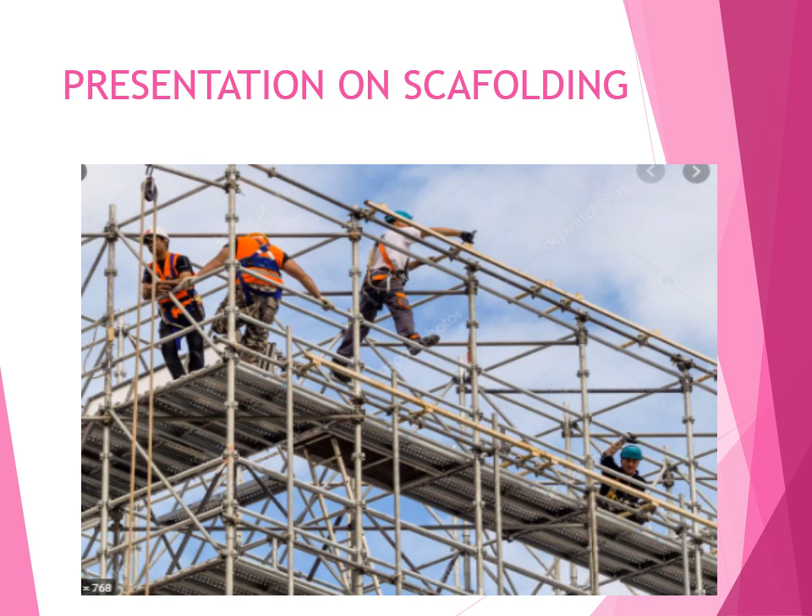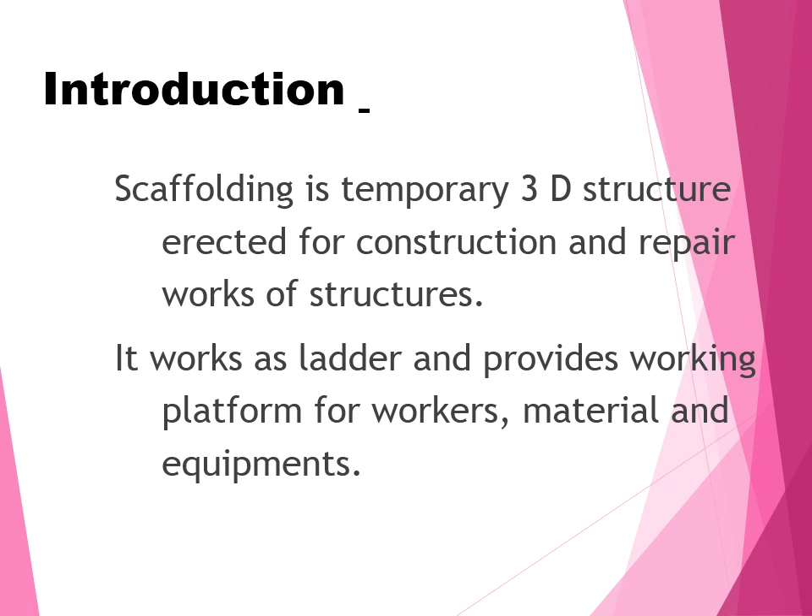Introduction. Scaffolding is a temporary 3D structure erected for construction and repair works of structures. It works as a ladder, provides a working platform as well as support for material and equipment.

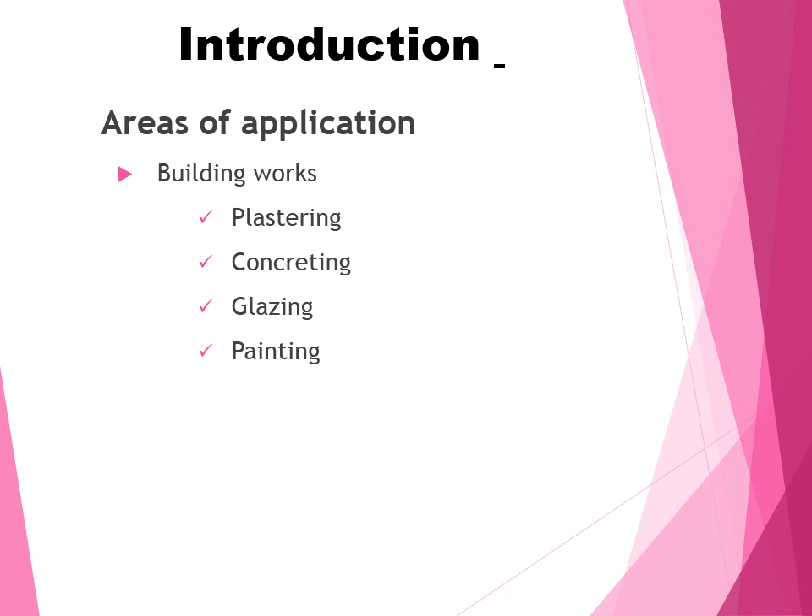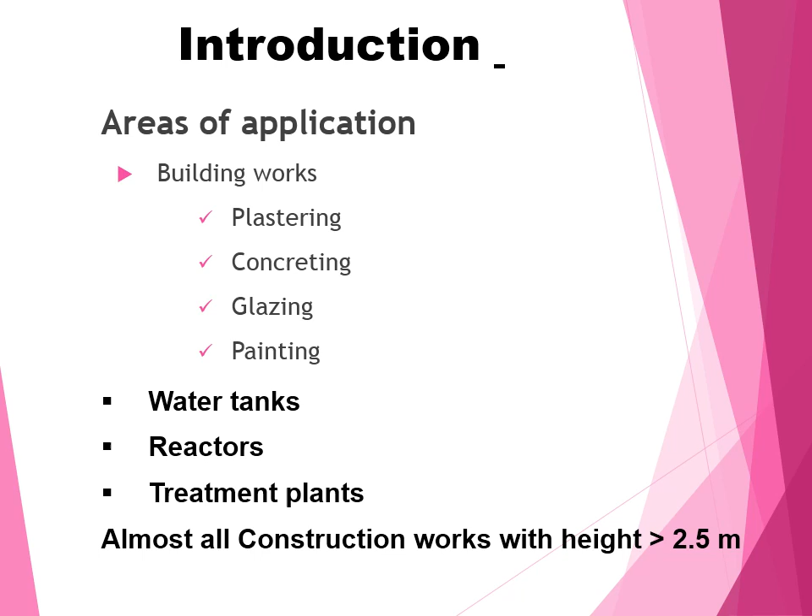Areas of applications. Building works. In building works, plastering, concreting, glazing, painting and other works which are to be done at higher elevations. Construction of water tanks, reactors, treatment plants, almost all construction works which have a height of more than 2.5 meters.

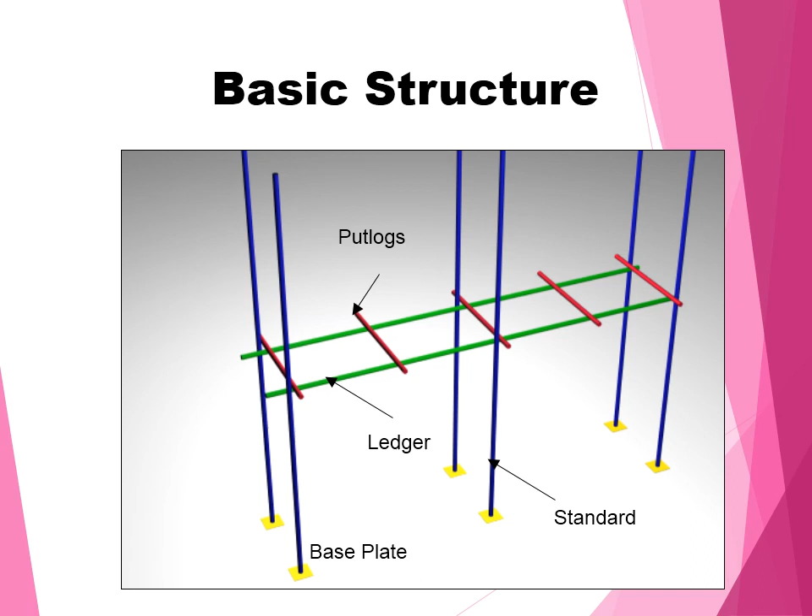Basic structure. A scaffolding consists of the basic structure which has a base plate at the bottom of the vertical mullions, which is known as a standard, and there is a ledger which is connecting the vertical mullions, and the putlogs. The putlogs connect both the horizontal mullions to avoid any lateral movements.

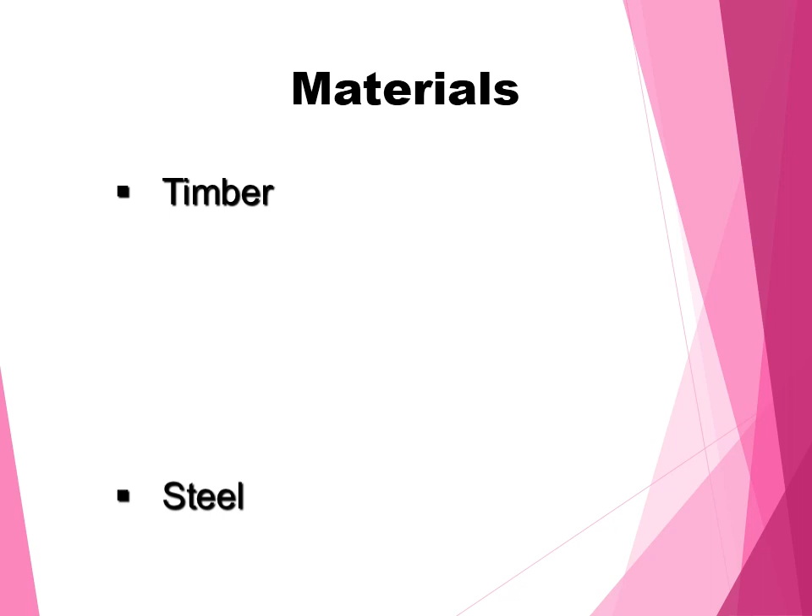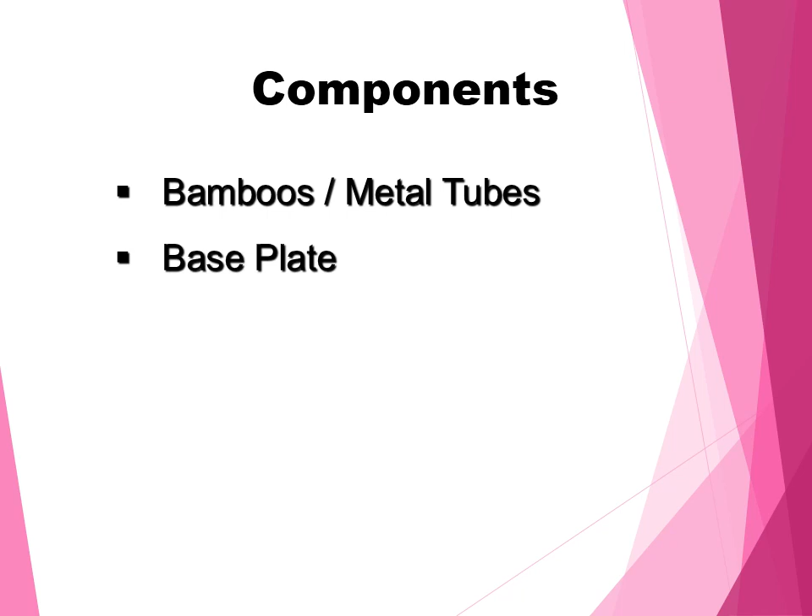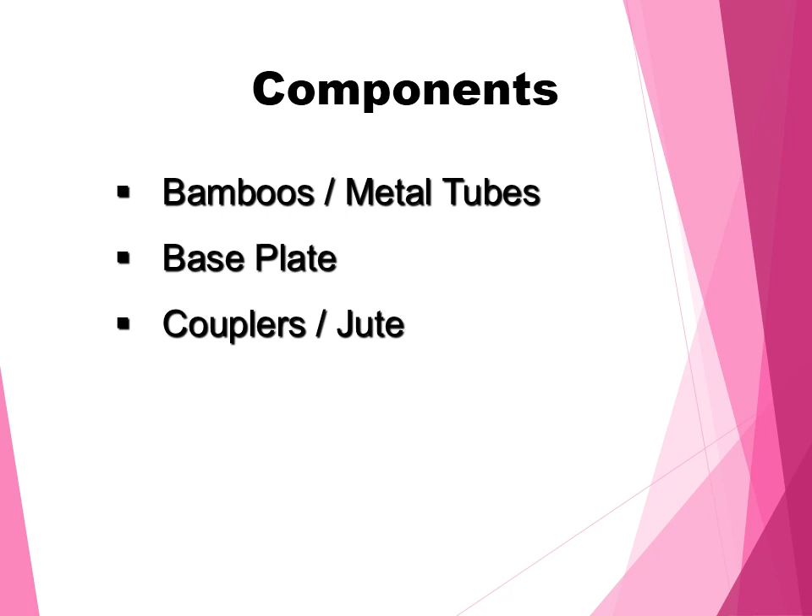Materials. It can be timber or steel. In steel it can be a black or a galvanized one, aluminum or any other suitable material. Components of a scaffolding: bamboos or metal tubes, base plates which are used for metal tubes, couplers and jute. Couplers are used for connecting the metal tubes, jute is for tying the bamboo members. Working platform, which is also known as decking.

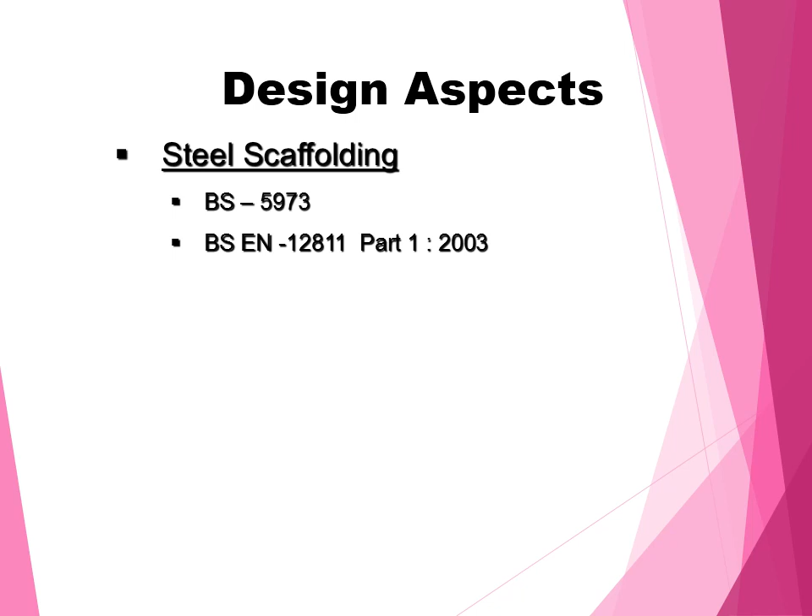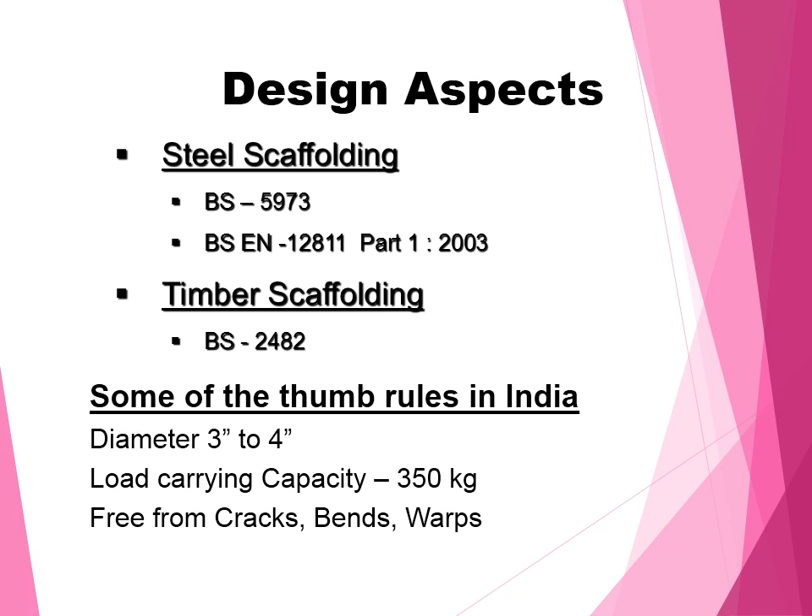Design aspects. Steel scaffolding is based on British Standard 5973, 12811 Part 1 2003. Timber scaffolding is based on British Standard 2482. Some of the thumb rules in India: the vertical mullions, when we are using Casuarina poles, should be 3 to 4 inches dia. Load carrying capacity will be 350 kgs. Free from cracks, bends and warps.

Steel pipe scaffolding. Steel pipe scaffolding as per IS 1161 is as follows. If the dia is 50 to 60 millimeter and the class is light, the thickness will be 2.9 millimeter. Weight per kg per centimeter is equal to 4.08. CSA per square centimeter 1711. In the case of medium, it will be 3.6 thickness, 5.09 weight per kg per centimeter, and 1667 is the CSA.

In case of heavy, 4.5 is the thickness in millimeter, 6.19 is the kg per centimeter, 1611 is the CSA per square centimeter. If the pipe is 65 to 76.1, light will be 5.71, 7.32, 2189. Medium will be 6.42, 8.2 and 2163, which means thickness, weight per kg per centimeter and CSA per square centimeter respectively.

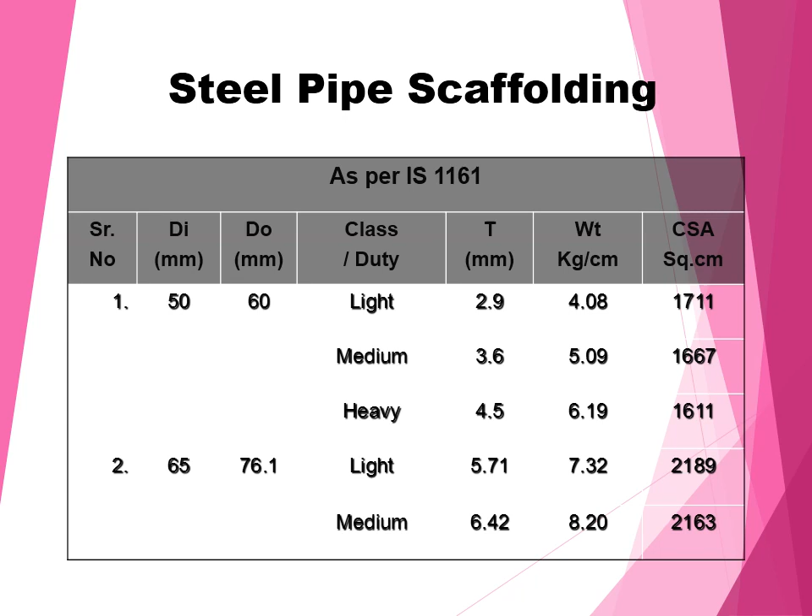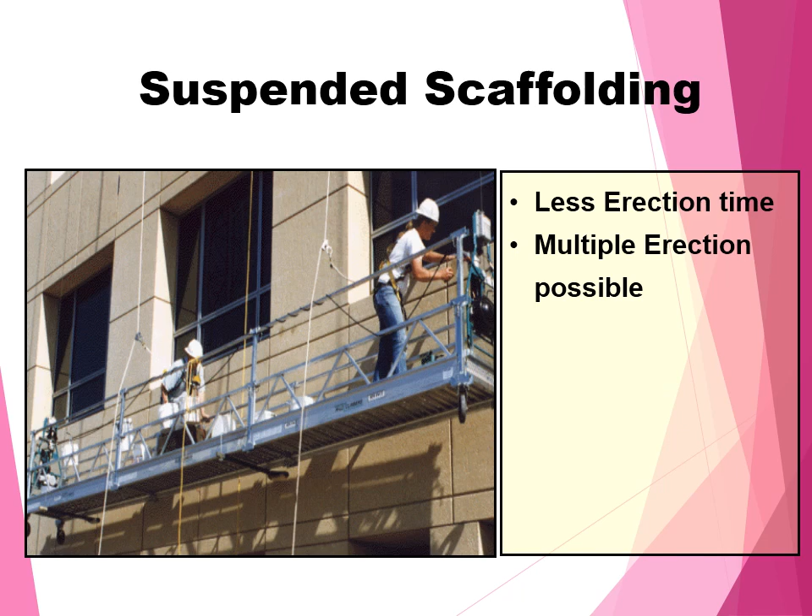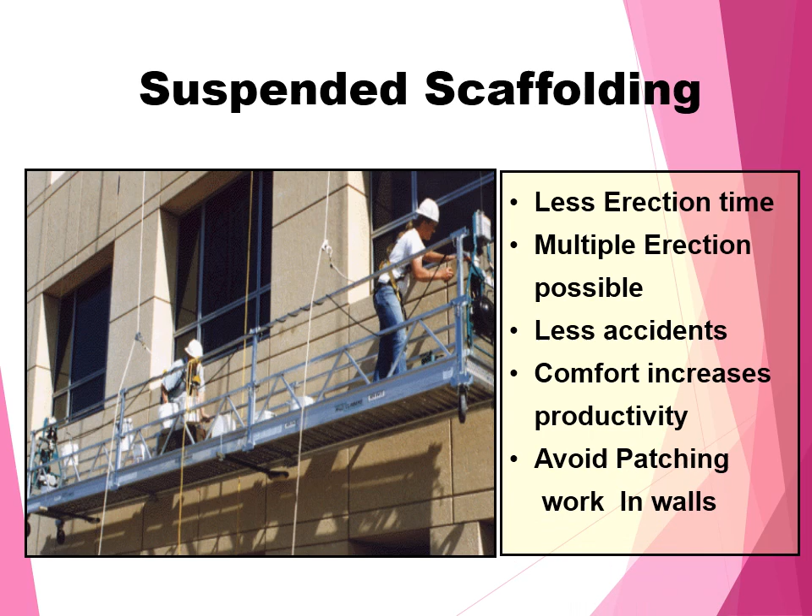Suspended scaffolding. This is nowadays mainly used for cleaning the external cladding, external facade, etc. It requires less erection time, multiple erection is possible, fewer accidents, comfort increases the productivity. Avoids patching work in walls.

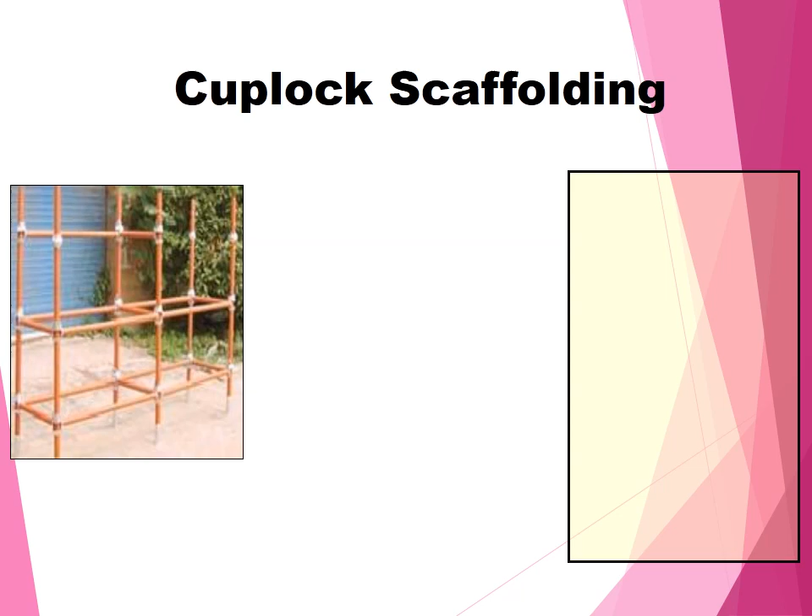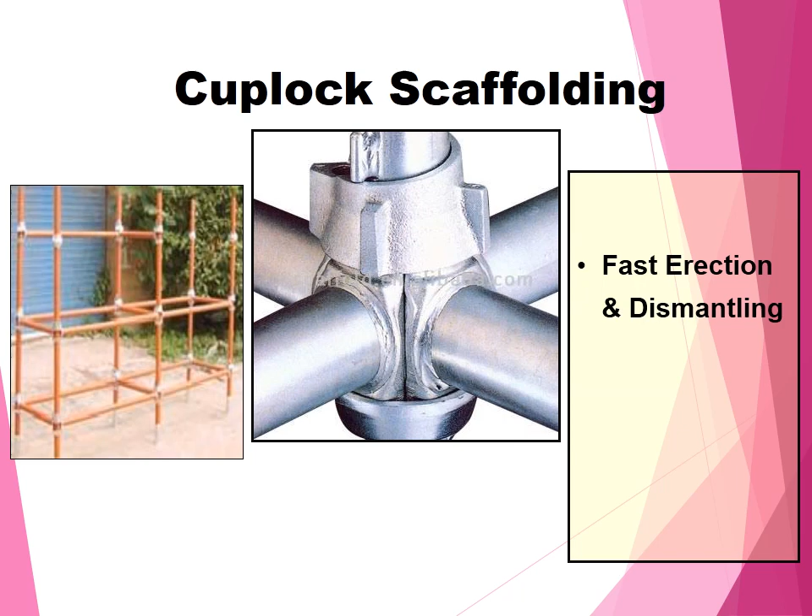Cuplock scaffolding. This is the image of a cuplock scaffolding which has pipes connected with cuplocks. This is a cuplock, which can be categorized as 90 degrees, swivel coupler, etc., which will be explained in the next pages. It gives you fast erection and dismantling. Can be used for centering also.

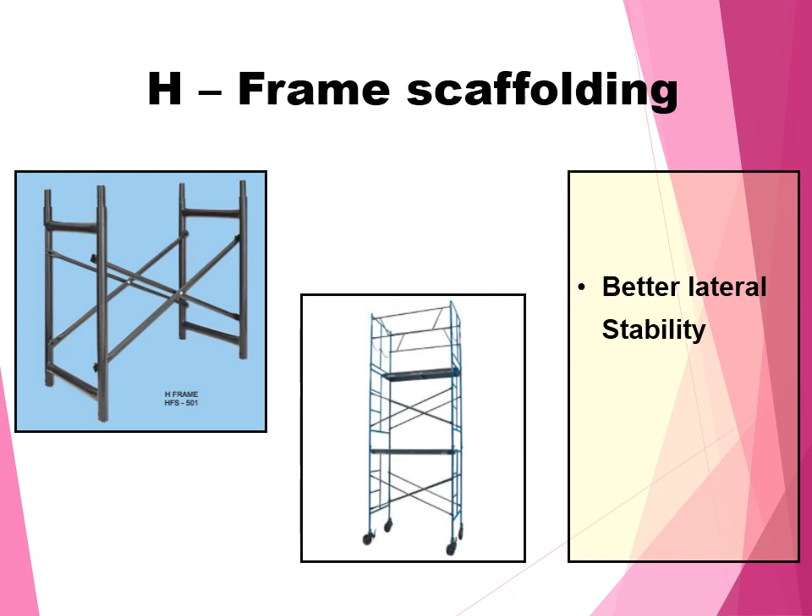H-frame scaffolding. H-frame scaffolding looks like this. Dimensions will be 2 meters by 1.1, etc., as per the manufacturer specifications. It will look like this, connected with the tie bracing and everything. You can put a wheel at the bottom so that you can move it as a movable scaffolding for any other works. Better lateral stability as it has been tied with the bracings. Faster erection, can be folded so that it will not occupy major spaces.

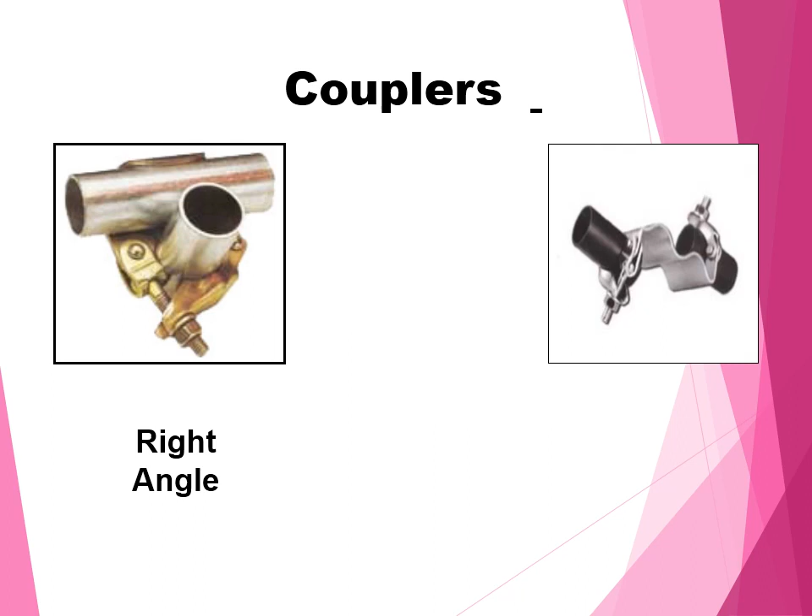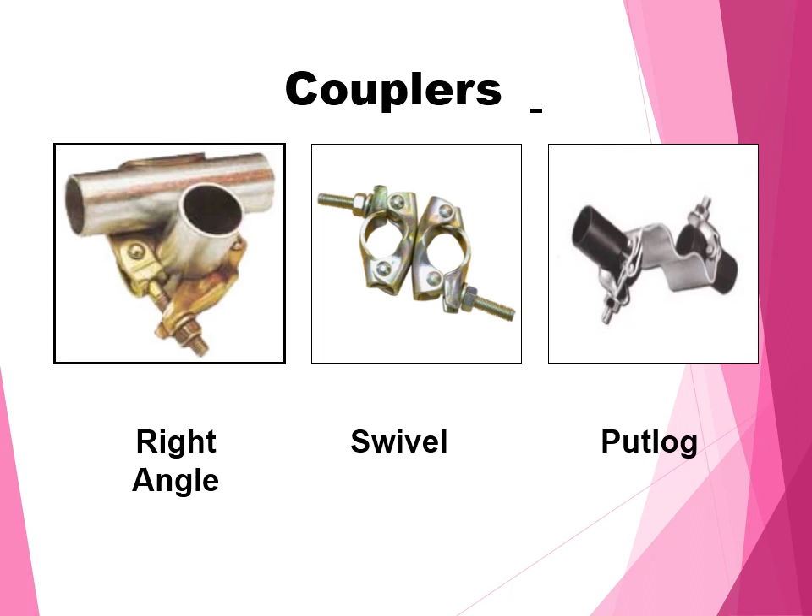Couplers. This coupler is known as the right angle coupler, wherein you can connect it to a vertical member and the horizontal members. This is known as a swivel coupler. You can connect it vertical, horizontal, at any direction. And this is a putlog, which connects the horizontal member to the lateral members.

Dimensioning. This is known as H-frame dimensioning. This is the base lift, which I am talking about at the bottom. Transom spacing, which is known as a putlog system. This is the lift height between the bottom to top. Scaffolding width will be between the two frames. Bay length will be from one vertical member to the other vertical member.

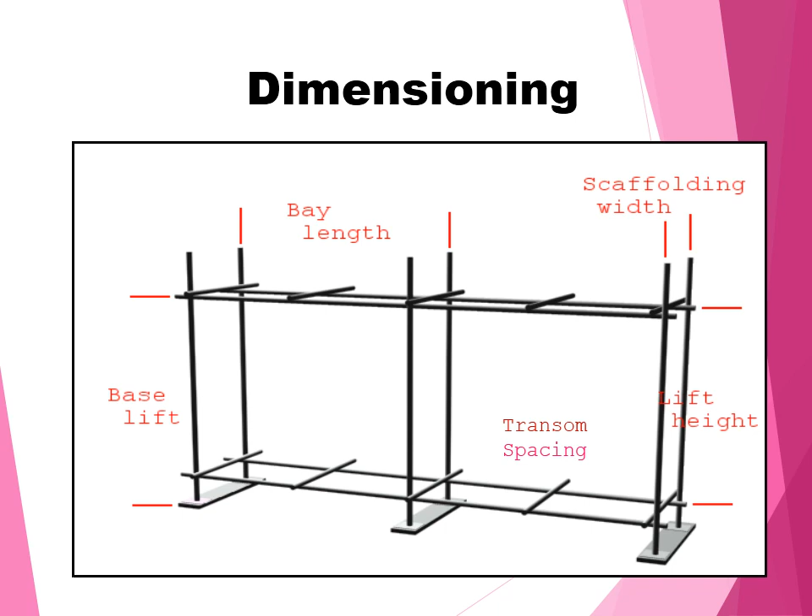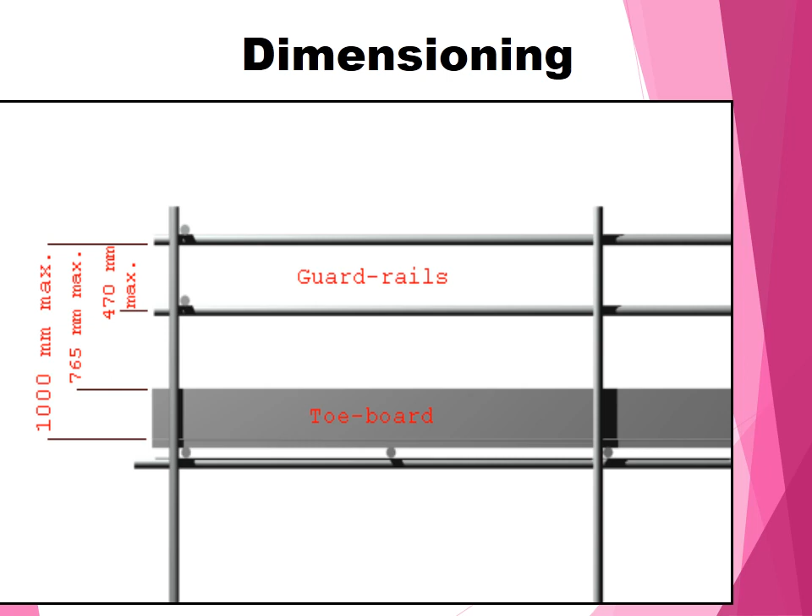It will have guardrails to protect it so that nobody can fall out. Toe board so that you can fix it up perfectly. It is 1000 millimeter from the toe board to the guardrail, and toe board top to guardrail will be 765 mm, and between the two bracings it will be 470 mm. That is supposed to be the maximum.

Dimension and purpose and maximum limit. Bay length in general will be 2.1. Heavy works it is 1.8. For inspection it will be 2.7. Scaffolding width in general will be 870. Heavy works it should be 600. Base lift for all purposes should be 2.2. Lift height for all purposes will be 1500 mm.

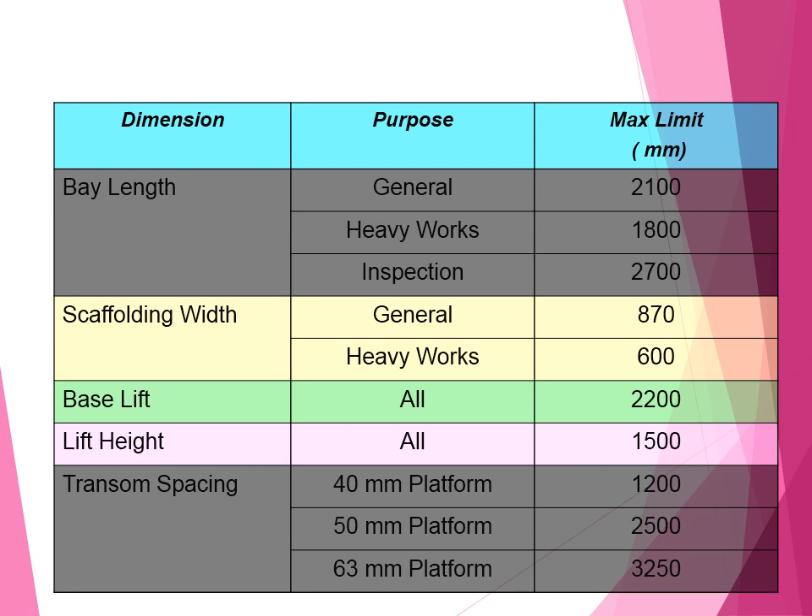Transom spacing: 40 mm platform 1.2, 50 mm platform 2.5, 63 mm platform 3.25, which has been shown in the earlier images. Kindly refer to the earlier images.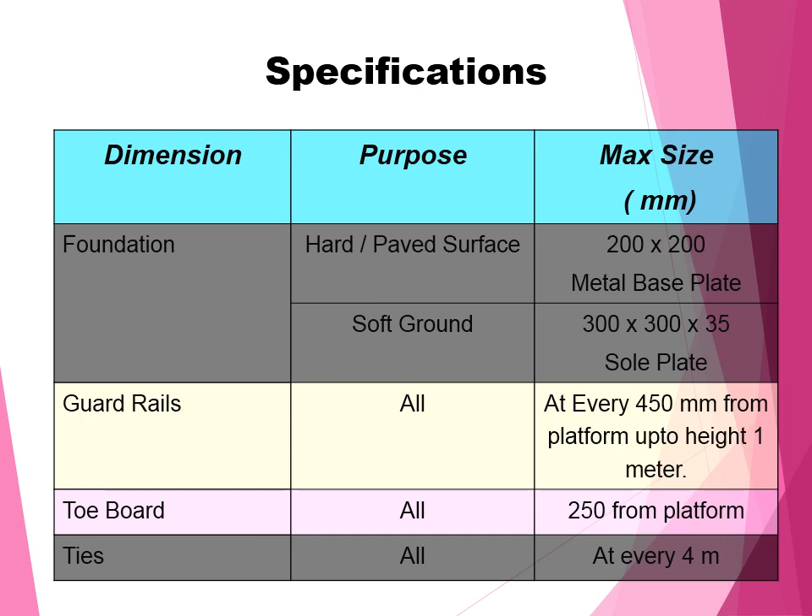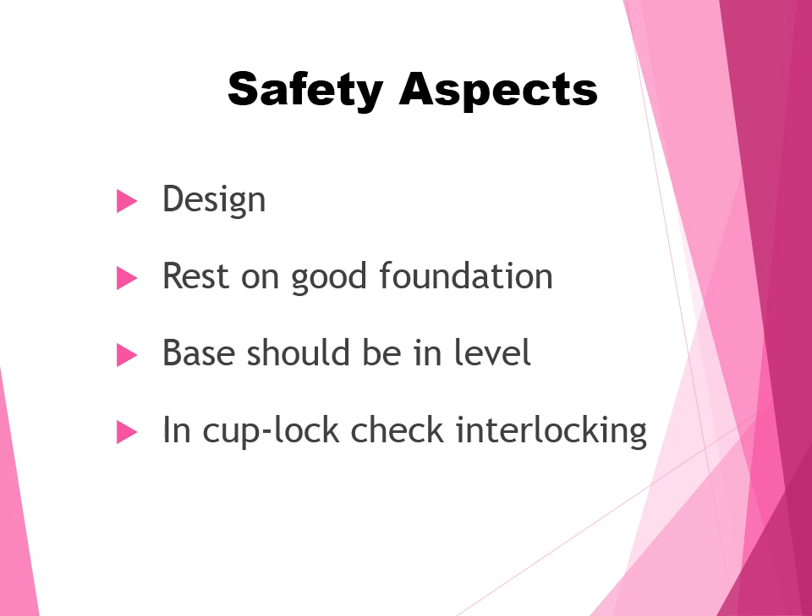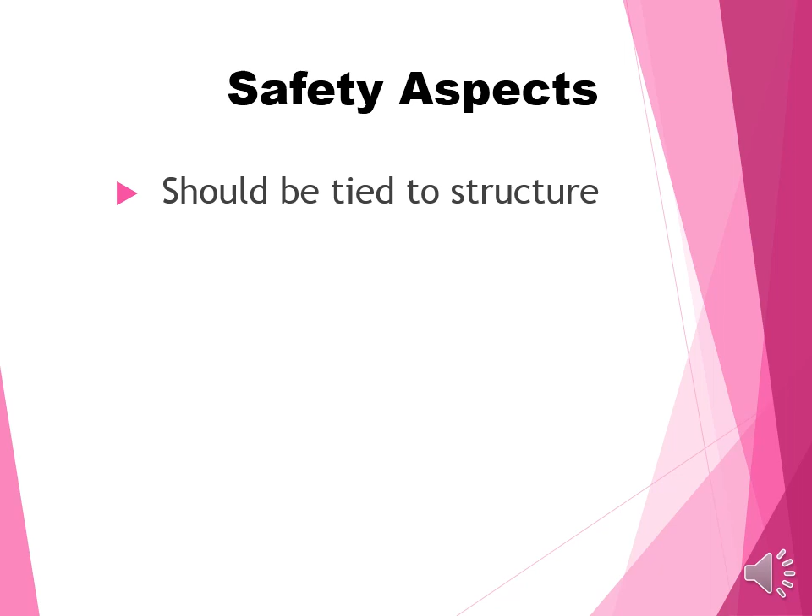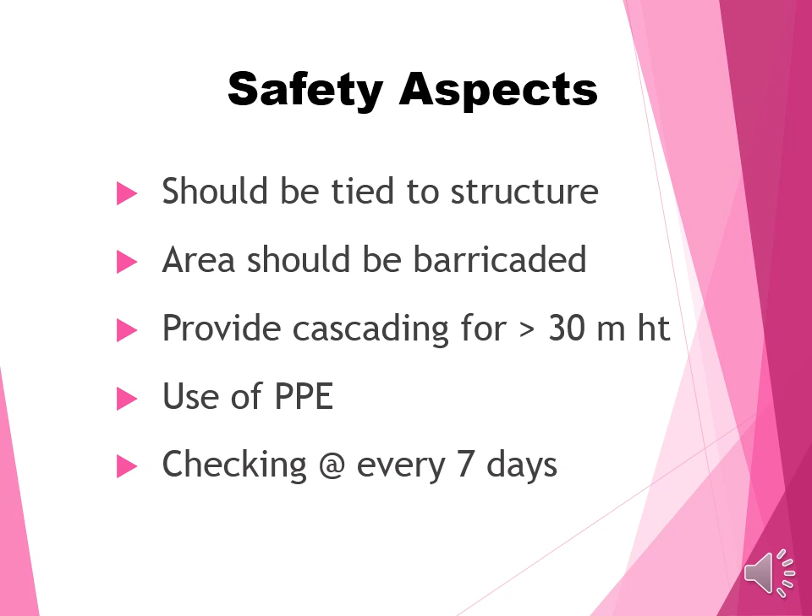Safety aspects. Design, rest on good foundation, base should be level. In cuplock, check interlocking. It is the most critical subject. Plumb should lean towards the building. Make sure it is done. Safety aspects continued. Should be tied to the structure. Area should be barricaded so that no unwanted incidents can happen. Provide cascading for greater than 30 meter height. Use personal protective equipment. Check very frequently to ensure that the entire scaffolding is intact.

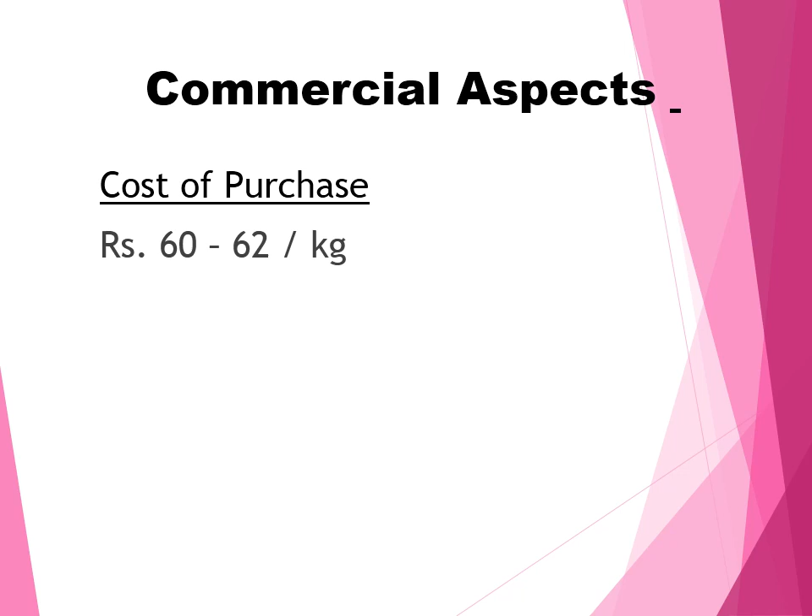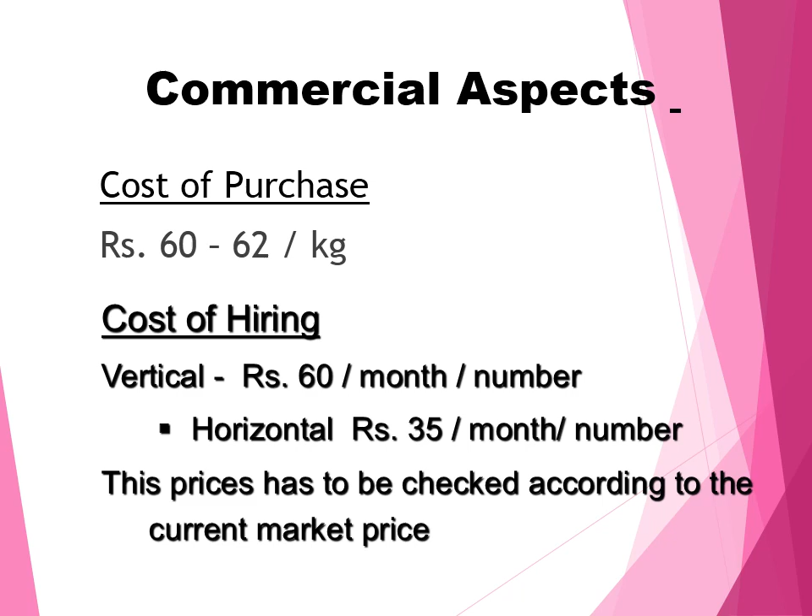Commercial aspects. Cost of purchase: it will be 60 to 62 rupees per kg. Cost of hiring: vertical will be 60 rupees per month per number. Horizontal 35 rupees per month per number. These prices have to be checked at your location, at your project, for deriving the final cost.

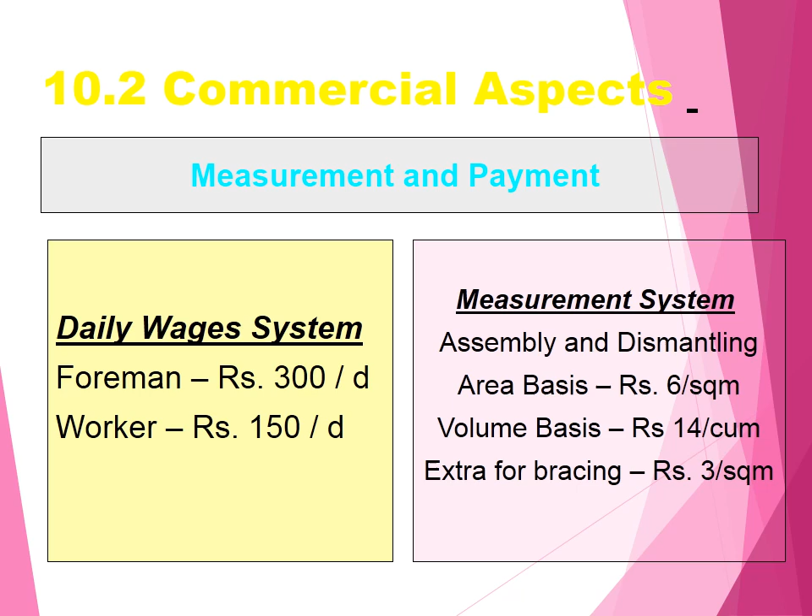Popular brands in the scaffolding system: Doka, Cosmos, Universal Construction Equipments, Tejas Industries, Shakti Star Scaffolding, and British Scaffoldings.

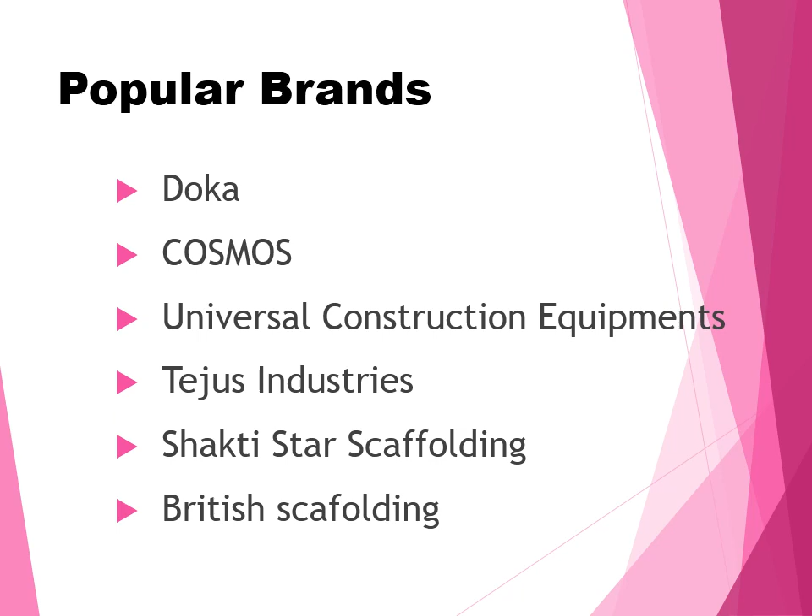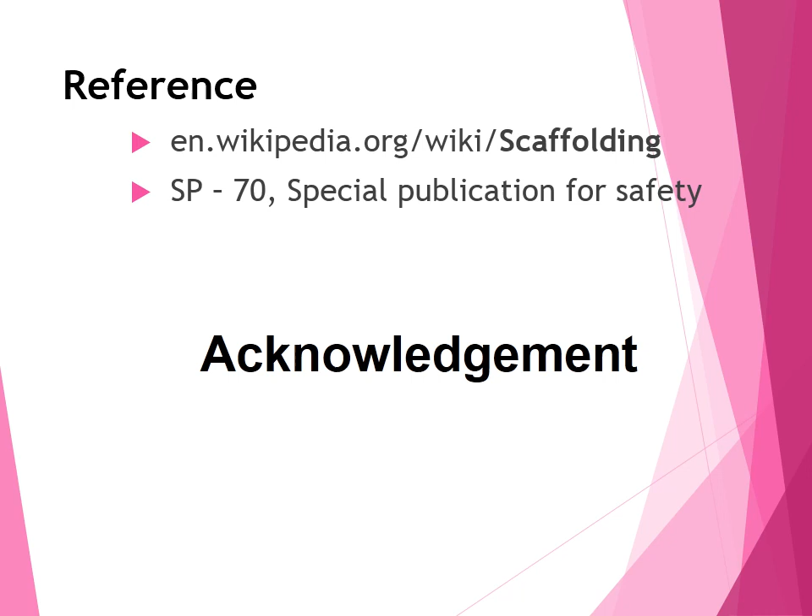Acknowledgement. References: Wikipedia.org, you can find it from there. SP70, Special Publication for Safety. IS 1161, Steel Pipe Design.